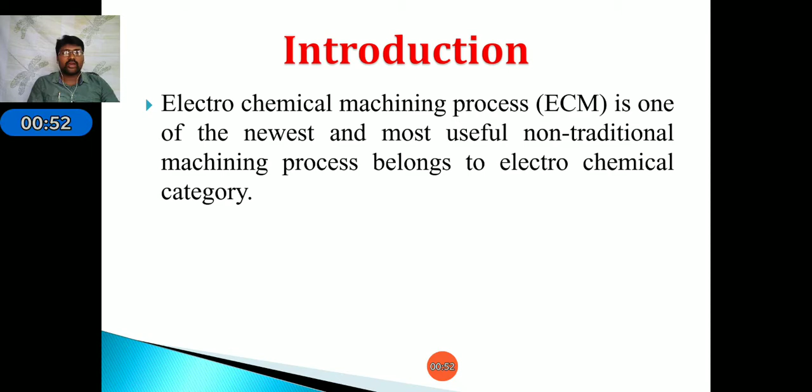The electrochemical machining process, known as ECM, is one of the newest and most useful non-traditional machining processes. It belongs to the electrochemical category. It is useful to machine metals as well as alloys which are difficult or impossible to machine by using conventional machines.

Because if you machine those hard materials and alloys, we require special type of machine tools, and the tool is more harder than the given material. By using these conventional machineries, the tool wear increases and material removal rate decreases, and it takes more time. At the time of applying forces, more stresses will be applied on the material. These are the different limitations of the conventional machining process.

In the case of electrochemical machining process, the tool will not touch the workpiece. Based on this, there is no tool wear in this type of machining process.

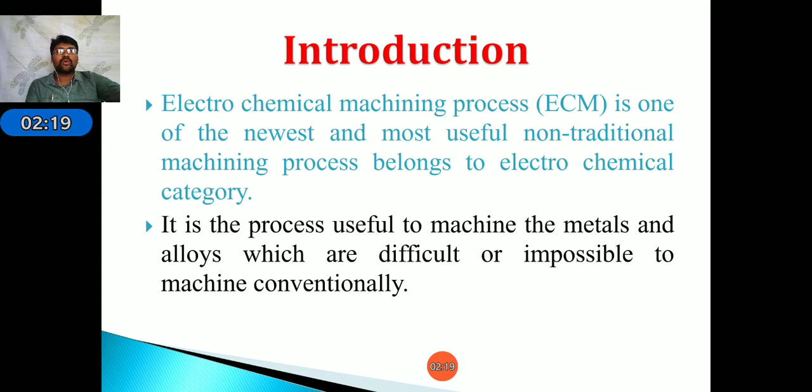Coming to working principle: in ECM, the metal removal takes place by electrochemical dissolution of an anodically polarized workpiece.

The metal is removed from the workpiece by passing electricity to the workpiece, and the workpiece and tool are immersed in the electrolyte solution. The electrolyte solution passes in between the tool and workpiece.

After supplying the electric power source, the negative terminal is given to the tool and the positive terminal is given to the workpiece. Between the tool and workpiece, we maintain some gap, and in that gap we pass the electrolyte solution, which acts as a conducting material. Whenever electricity is passed through the electrolyte, the circuit will be closed.

Here, whatever the shape of the tool, the same shape will be machined on the workpiece.

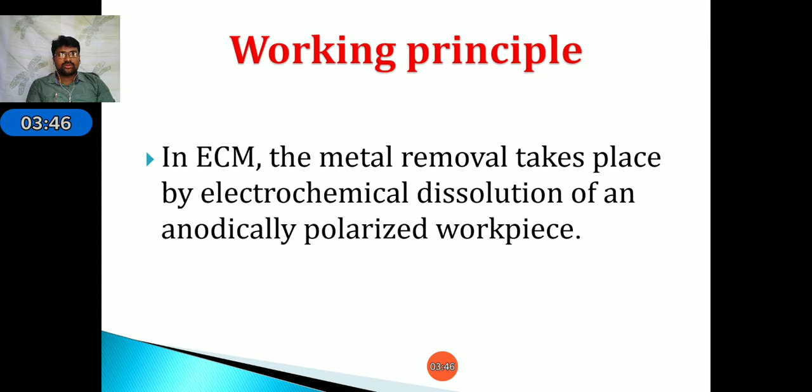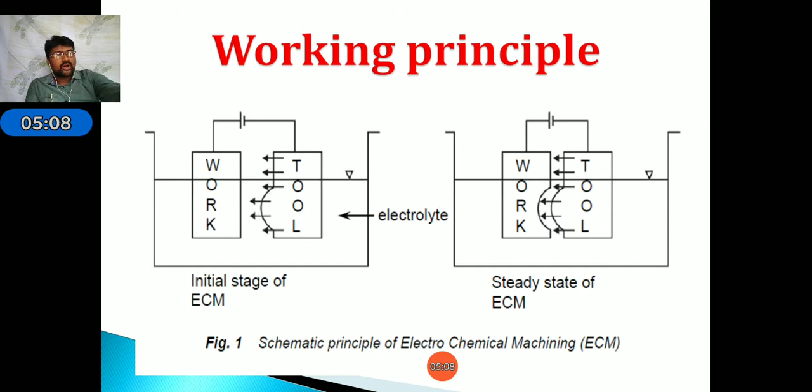In between the tool and workpiece, the electricity will pass due to this dissolution principle. If the material is removed, how will it be removed? We'll see in the next diagram.

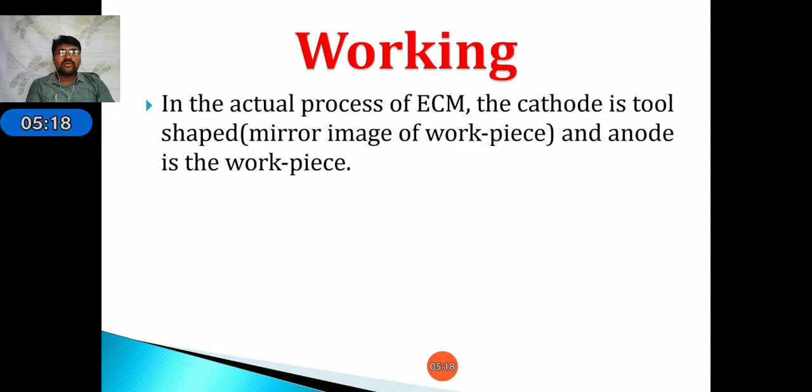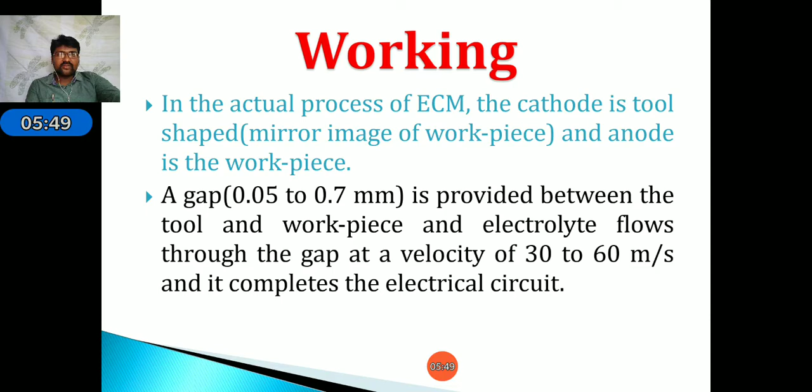In the actual process of ECM, the cathode is tool shaped, that is the mirror image of the workpiece, and the anode is the workpiece. The gap between the workpiece and tool is in the range of 0.05 to 0.7 mm based on the type of material, and the electrolyte flows through the gap at a velocity of 30 to 60 meters per second, completing the electrical circuit so that electricity passes through the circuit.

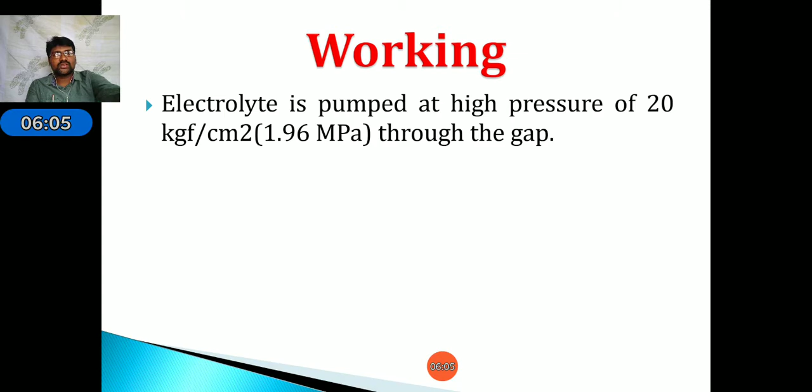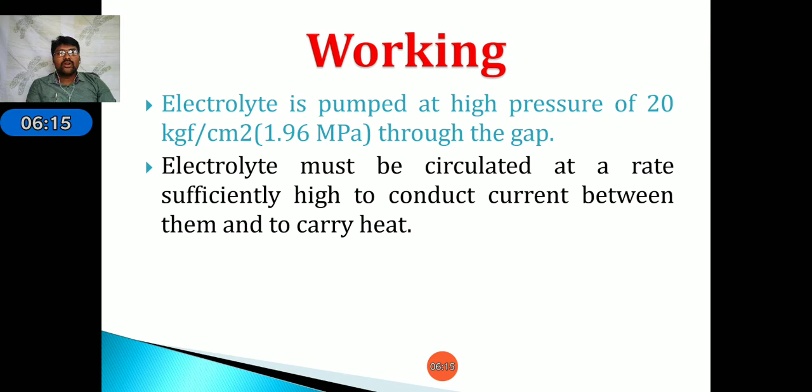Electrolyte is pumped at high pressure of 20 kg per centimeter square, that is 1.96 megapascal, through the gap. The electrolyte must circulate at a rate sufficiently high to conduct current between them and to carry away heat. The metal is removed from the workpiece by dissolution of material.

Whenever we supply the power source, the electrons move from the tool to the workpiece and workpiece to the tool, changing negative to positive and positive to negative. Here the ferrous (Fe) combines with chloride: Fe plus plus and Cl minus combine to form FeCl2, ferrous chloride. The metal particle from the workpiece is removed during the machining process and reacts with chloride to form ferrous chloride, which forms a layer at the bottom of the tank. Next, another ferrous reaction with OH minus forms FeOH2, ferrous hydroxide.

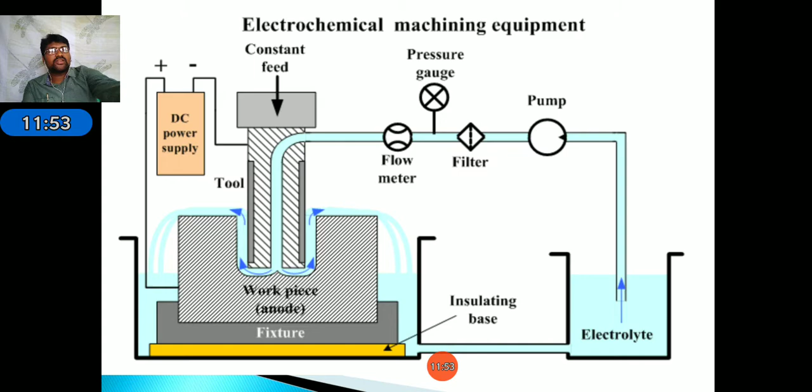The power supply has the negative terminal given to the tool, which is the cathode, and the positive terminal given to the workpiece, which is the anode. Whenever we pass electricity, the circuit is closed and electricity passes through the tool from the workpiece via the electrolyte solution. This reacts with the ferrous material and the electrolyte solution, forming FeCl2 and FeOH2. By this, material is removed, and the machining process is completed.

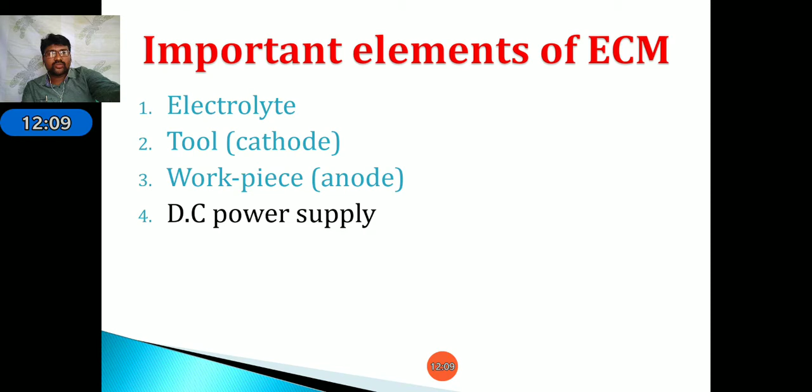Next, the important elements in ECM are: electrolyte solution, tool, workpiece, and DC power supply. Coming to electrolyte, these are different from metallic conductors of electricity. Generally we use copper, steel, and different materials to transfer electricity from one point to another, but here the electrolyte solution acts as the conductor. In electrolytes, current is carried by atoms or groups of atoms, not by electrons.

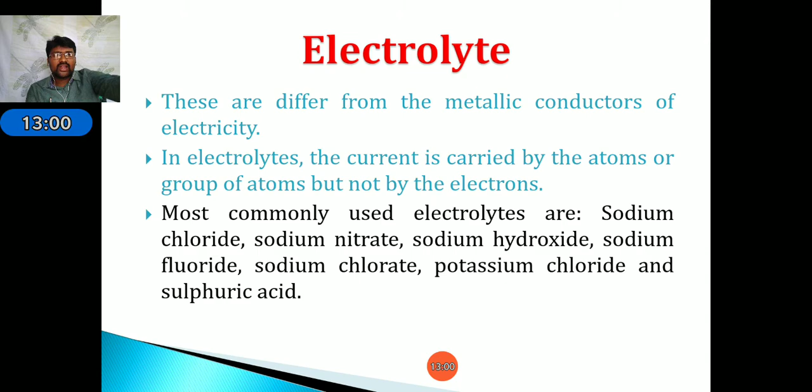The most commonly used electrolyte solutions are sodium chloride, sodium nitrate, sodium hydroxide, sodium fluoride, sodium chlorate, potassium chloride, and sulfuric acid. These are the different electrolyte solutions used in the electrochemical machining process.

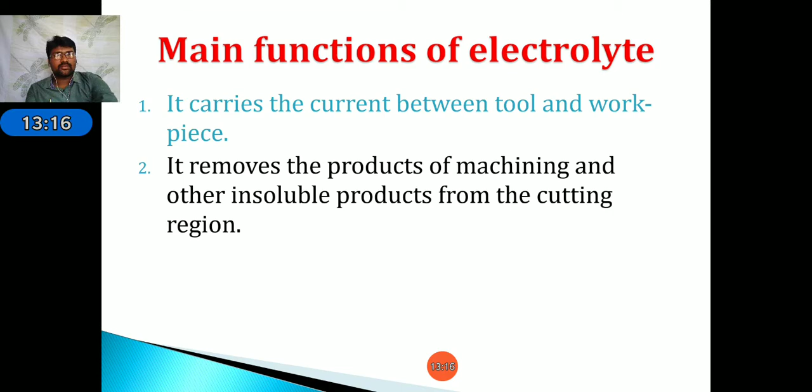The main functions of the electrolyte: it carries the current between the tool and workpiece, and it removes the products of machining and other insoluble products from the cutting region. During the metal removal process, the insoluble particles move to the bottom side, removing particles from the working area. It also dissipates heat produced during the operation.

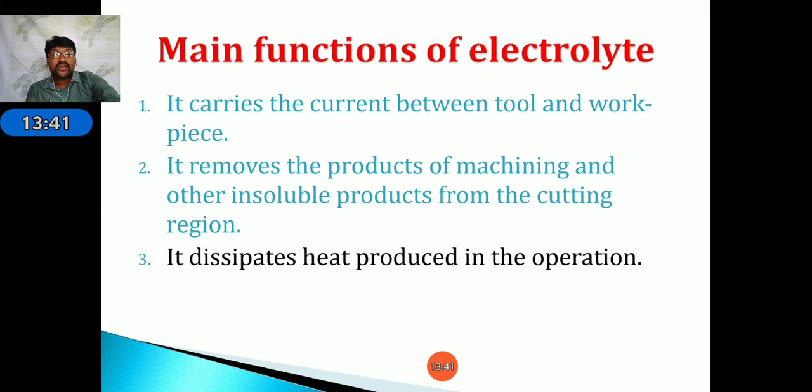The essential characteristics of electrolyte are: good electrical conductivity, non-toxicity and chemical stability, non-corrosive property, low viscosity, and high specific heat.

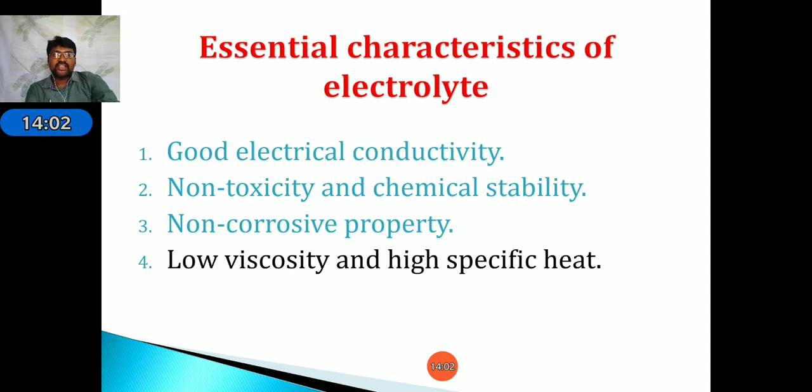Coming to tool material, the most commonly used tool materials are copper, brass, titanium, copper-tungsten, and stainless steel. When electrolyte is made of salts of sodium and potassium, these materials are used as tool material. Other tool materials include aluminum, graphite, bronze, platinum, and tungsten carbide.

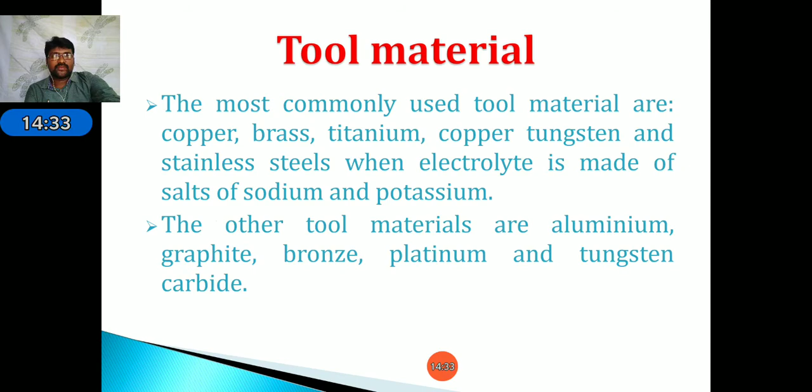Next, coming to metal removal rate, by using Faraday's law of electrolysis. This first law states the amount of any material deposited or dissolved is proportional to the electricity passed, that is, MRR depends mainly on the electricity passed.

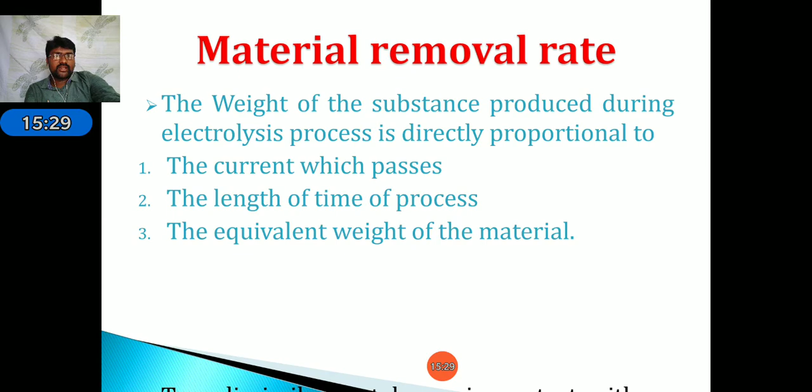Next, two dissimilar metals are in contact with electrolyte, and the anode loses metal at the cathode. These are the conditions.

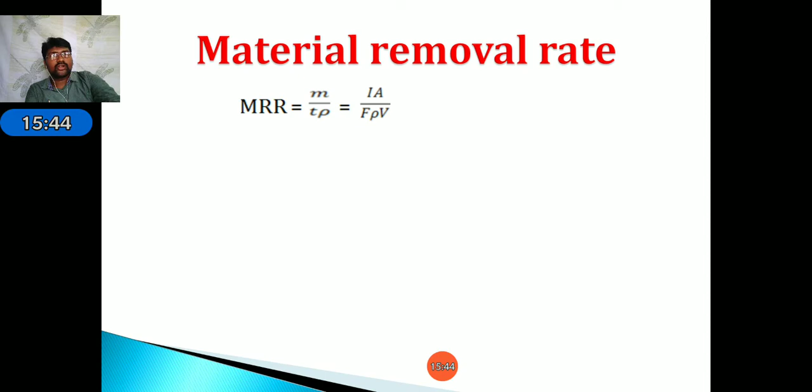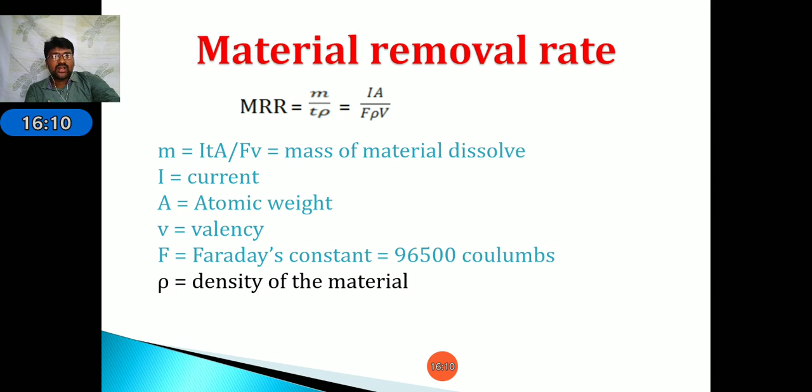Coming to material removal rate, using mathematical representation: m equals I T A by F V, where m is the mass of material dissolved, I is current, A is atomic weight, V is valency of electrons, F is Faraday's constant equal to 96500 coulombs, rho is density of material, and T is the time during which electricity flows into the circuit.

Next, coming to process parameters, that is power supply. The type is direct current, with voltage 2 to 35 volts, current 50 to 40,000 amperes, and current density 0.1 ampere per mm square to 5 ampere per mm square. These are the parameters of power supply.

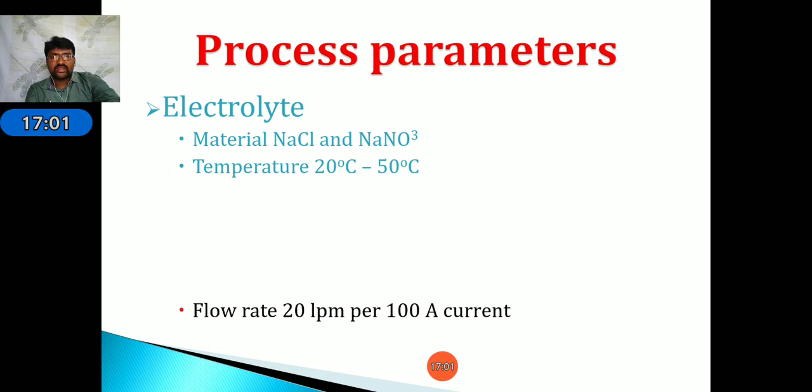Next, coming to electrolyte solution material, that is NaCl, sodium chloride, and sodium nitrate. The temperature of electrolyte should be maintained between 20 to 50 degrees. Flow rate is 20 lpm per 100 ampere current. When we use 100 amperes, the flow rate should be 20 lpm; by increasing the current, the flow rate also increases. The pressure should be maintained between 0.5 to 20 bar, and dilution is 100 grams per liter to 500 grams per liter.

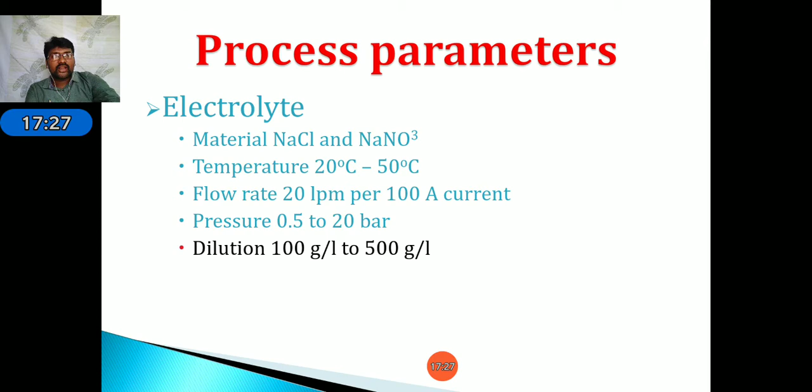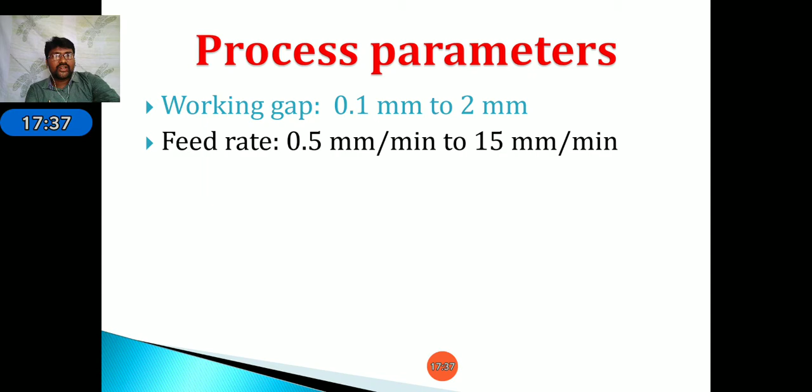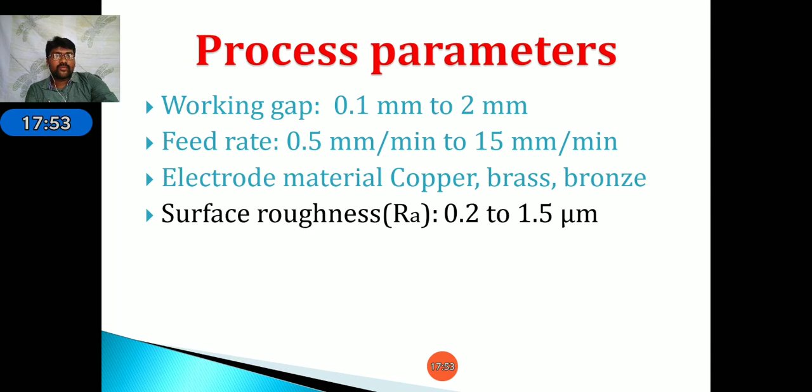Next, working gap is 0.1 mm to 2 mm, feed rate is 0.5 mm per minute to 15 mm per minute, electrode material is copper, brass, bronze, and surface roughness is 0.2 to 1.5 micrometer. These are the process parameters.

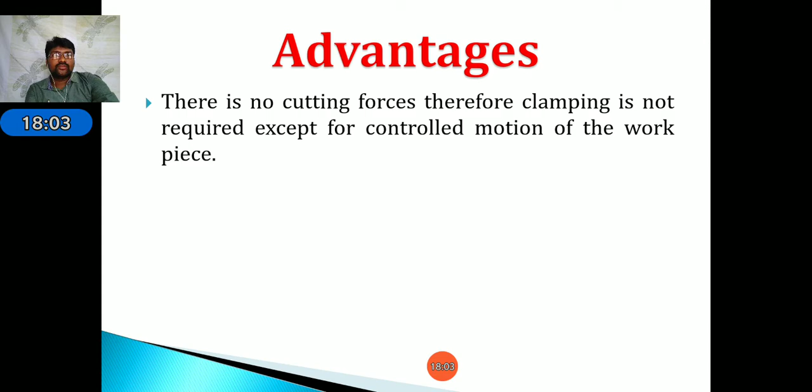Coming to advantages: there are no cutting forces, therefore clamping is not required except for controlling motion of the workpiece. In conventional machining, high amounts of forces develop during machining, so we have to hold the workpiece firmly. But in non-conventional machining like electrochemical machining, we do not require any clamping devices to hold the object.

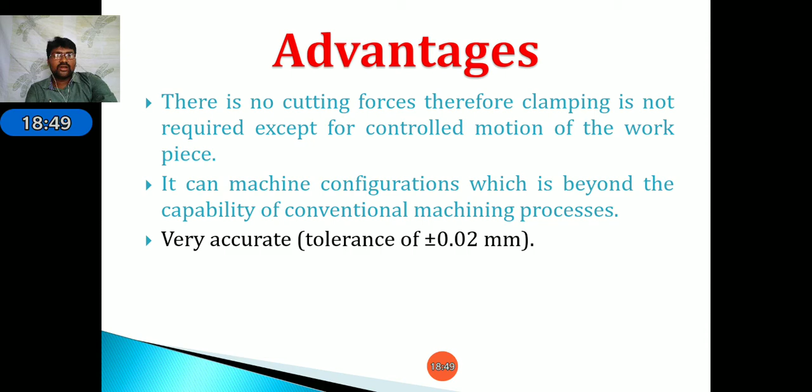It can machine configurations beyond the capability of conventional machining processes. Next, it is very accurate, with tolerance of plus or minus 0.02 mm, making it a very accurate process. Next, it is relatively fast.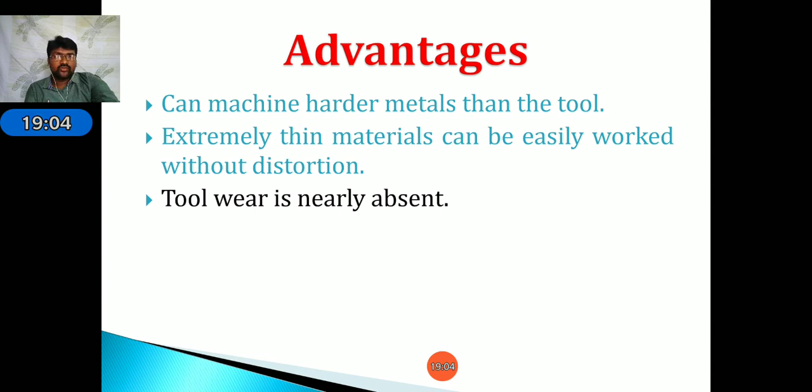Next, it can machine harder materials than the tool. Extremely thin materials can be easily worked without distortion. Tool wear is nearly absent because the tool does not touch the workpiece. Next, better surface finishing. These are the advantages.

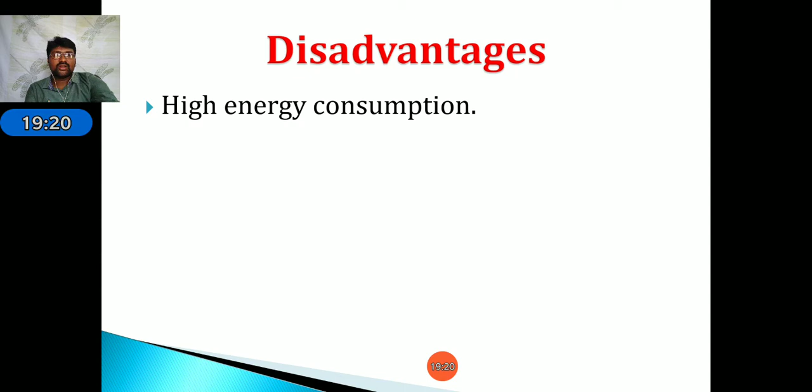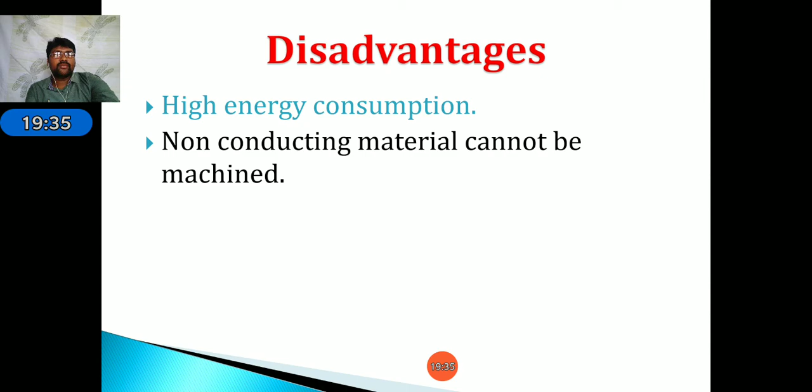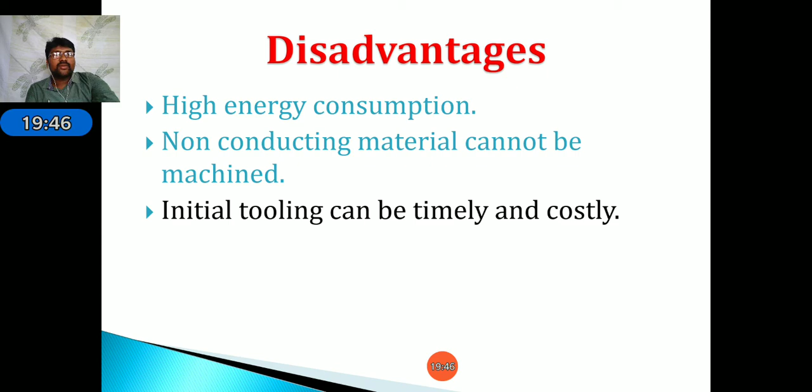Coming to disadvantages: high energy consumption because we are using an electrical source. Non-conducting materials cannot be machined because electricity will not pass through non-conducting materials - this is one of the disadvantages of electrochemical machining. Next, initial tooling can be time-consuming and costly. Next, there are environmentally harmful byproducts.

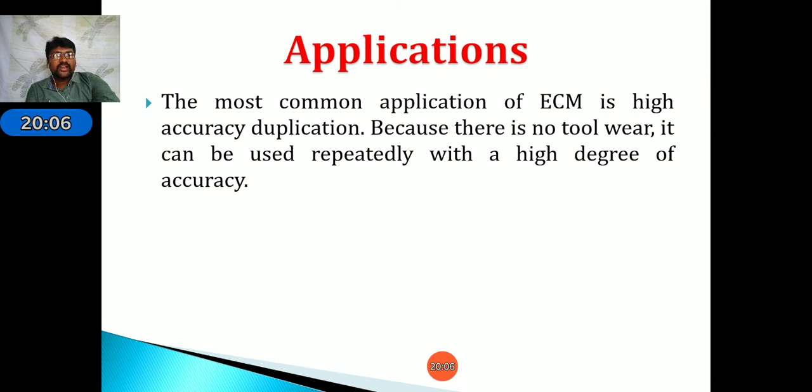Next, coming to applications. The most common applications are: ECM is used for high accuracy duplication, because there is no tool wear, it can be used repeatedly with a high degree of accuracy. Next, it is commonly used for thin walled, easily deformable and brittle materials, because they would probably develop cracks with conventional machining process. Next, it is used in machining of hard heat resisting alloys.

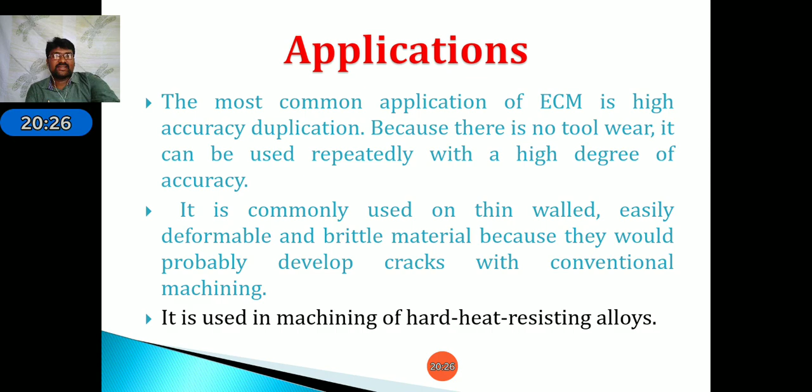Next, it is used in cutting cavities and holes in various products like machining aerospace components, turbine blades, and machining of tungsten carbide and nozzles. These are very hard materials, which are machined by electrochemical machining process very easily. Next, any conducting material can be machined by this method.

This is about the electrochemical machining process. Thank you.